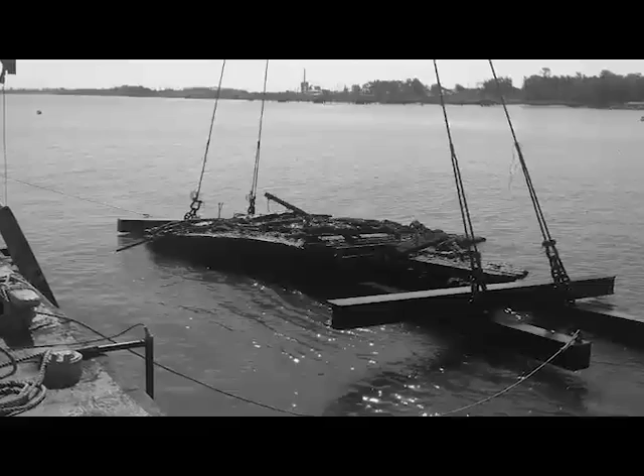The Confederacy continued with their habit of repurposing old ships and, like a nautical Dr. Frankenstein, brought the Merrimac back from the dead. The additions they made would render the ship unrecognizable. The newly named CSS Virginia sported 10 cannons, an armored casemate, and a ram like the Manassas. Because of the thickness and angle of its armor, it became a near unstoppable floating fortress. This ship posed a significant threat to the Union's navy.

The Union caught wind of the construction of the CSS Virginia early on. Realizing the potential threat that the new ironclad posed, the Union began to consider building their own. The Navy employed famous Swedish inventor John Ericsson for the creation of their ironclad. Ericsson was very forward-thinking and had pushed for a new and highly experimental design.

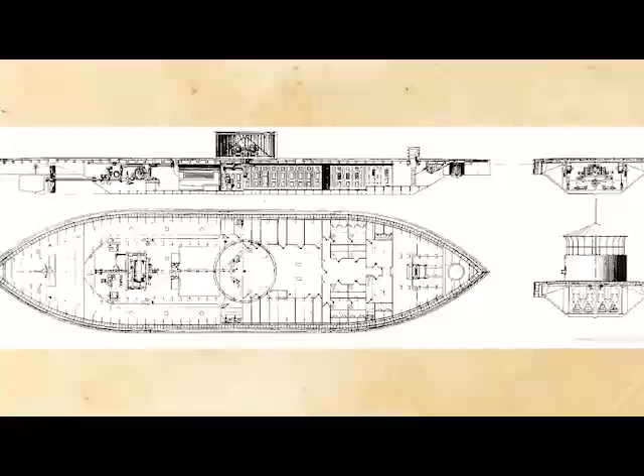His ship would be entirely steam-driven and feature the revolutionary addition of a rotating turret armed with 2 Dahlgren guns. It was the first the world had seen of its kind. This radical departure from traditional ship design wasn't without its controversy, but despite this, the government approved of Ericsson's idea.

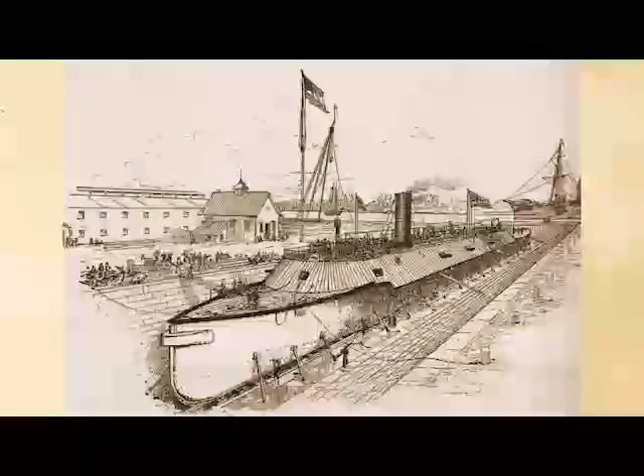Ericsson's ship, dubbed the USS Monitor, had only taken 118 days to launch. However, much of the focus the Monitor received from the press during its development was very critical. It was designed with the goal of rivaling the CSS Virginia, but its highly experimental nature and short development time made the ship seem like a significant gamble.

Yet this gamble was very necessary if the Union was to have a competing ironclad in time. While it didn't immediately sink like some had expected or hoped, it did have some issues with steering and engine power.

Because of the Confederacy's head start, the Virginia was nearing completion, so the Monitor's testing phase was somewhat rushed. The moment Ericsson finished testing the Monitor, it was sent south to Virginia in hopes of preempting the Confederacy's ironclad.

However, the Confederacy had just finished the CSS Virginia at the time and sent it to Hampton Roads to destroy the Union blockade that was blocking Confederate supplies from reaching ports inland.

From the moment of its arrival on March 8th, the Virginia was nearly unstoppable despite being incredibly outnumbered by Union ships. It rammed and subsequently sank the USS Cumberland, ran both the USS Congress and Minnesota aground, which caused the steam frigates St. Lawrence and Roanoke to retreat.

The day had been a real victory for the Confederacy as they were able to inflict over 280 Union casualties and extensive damages while only suffering trivial damage to their own ship. The Virginia did have to temporarily withdraw as the ship's deep draft was incompatible with low tides.

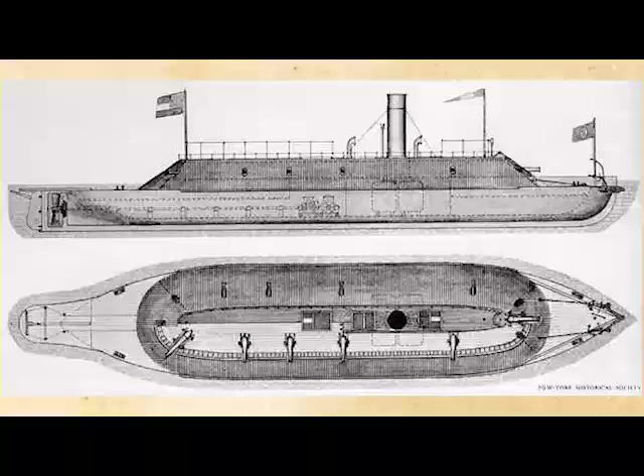The U.S. Navy had never seen a defeat this bad before. Large crowds of civilians and sailors watched this battle unfold. Even more were present the next day. Because so much was riding on this battle, people thought that it would possibly determine the outcome of the war.

The morning of the next day, the Virginia came back to finish what it had started. However, this time things wouldn't go as smoothly for the Confederacy. The Union's ironclad, the USS Monitor, had arrived to reinforce the fleet.

Aside from being equally well armored, the Monitor was much smaller, and its turret was the only part substantially above the water and able to be hit. Additionally, it was more maneuverable due to its more advanced engines and smaller size. Its turret only compounded this advantage.

However, despite all of the advantages that it had, it lacked the firepower to really damage the Virginia, and vice versa. This led to a long and intense battle that lasted almost 4 hours. Neither ship sustained anything more than minor damages. Because of the perceived invincibility of their respective designs, both armies viewed the outcome as a victory.

The Battle of Hampton Roads was significant in establishing the reputation that ironclads had. It demonstrated without a doubt that ironclads were far superior to conventional wooden warships in terms of effectiveness.

Nathaniel Hawthorne wrote about the event: 'The last gun of the Cumberland, when her deck was half submerged, sounded the requiem of many sinking ships. Then went down all the navies in Europe.'

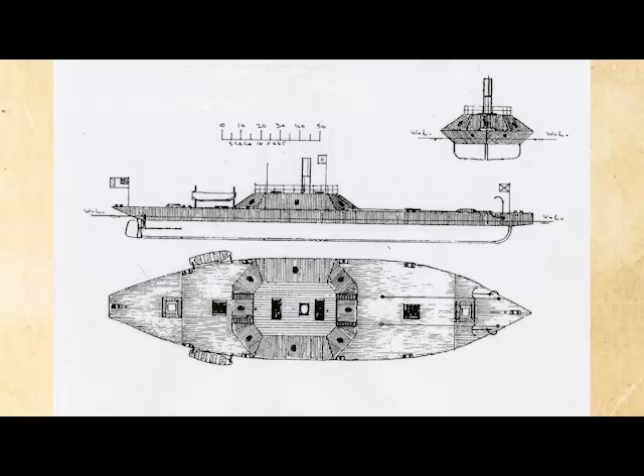The South made more ships inspired by the success of the Virginia, like the CSS Texas or the CSS Tennessee, which were both low-down river boats with slanted metal casemates. The Union was also inspired by this design and made many similar gunboats for their navy.

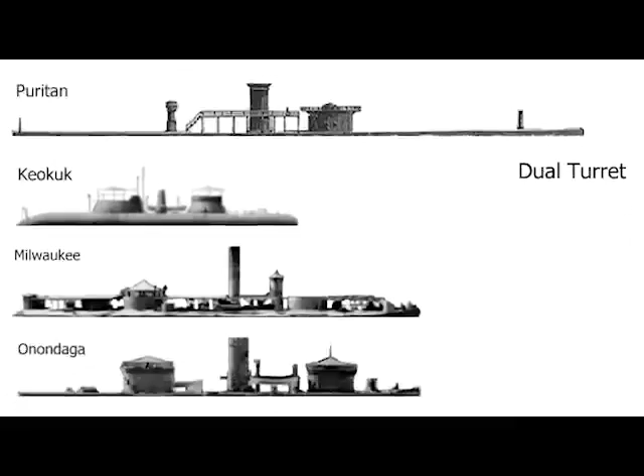Because of their greater industry, they were able to make more complicated designs as well. They continued to develop more advanced Monitor-class ships under the design of Ericsson. While the Confederacy had been the first to use ironclads, the Union quickly followed with the production of theirs and maintained naval superiority for the rest of the war.

Because of their comparatively low amount of ironclads, the South had to rely on many refitted civilian ships to make up for the disparity between navies. These ships were often woefully under-armored and undergunned.

During the Battle of Memphis on June 6, 1862, the Confederate naval forces were composed of 8 minimally armed trade ships that came up against 5 Union ironclads accompanied by 2 rams, heading down the Mississippi River to assault Vicksburg.

In a very odd move, the Confederacy used their surplus of cotton to their advantage, and had loaded their ships to the brim with bales of it as makeshift armor. The strategy of these amusingly named cottonclads was to use the cotton to allow it to survive long enough to get within close range of the enemy ship.

Unsurprisingly, this wasn't a viable tactic, and the battle ended with a Union victory, with 7 out of the 8 Confederate cottonclads being knocked out, while only 1 Union ram was damaged significantly.

The Union's use of ironclads provided invaluable aid in many battles and enabled them to take over the Mississippi River. They played a large part in the Battle of Fort Hindman where they suppressed the fort's defenders and allowed the infantry to advance and take the fort.

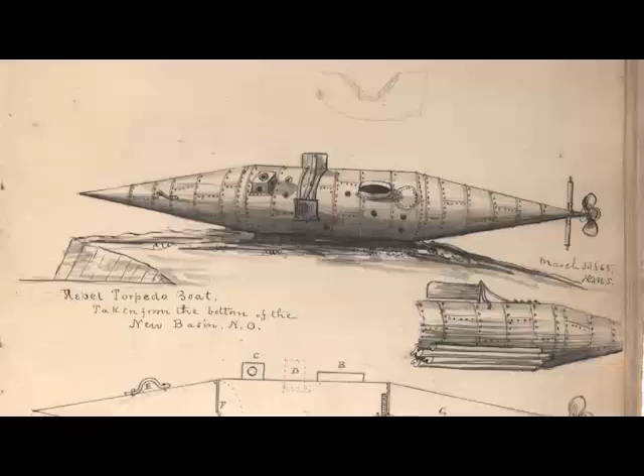It didn't see any combat, however, as it had to be scuttled to prevent capture from Union forces. After their next submarine design, the American Diver, sank in rough waters, the Confederacy created the first somewhat successful submarine, the H.L. Hunley, in 1863, named after its creator.

The Hunley was the first submarine to ever sink any vessel when it attacked the USS Housatonic. It was armed with what was essentially an explosive charge attached to a long pole to damage enemy vessels. This charge was likely too powerful for the Hunley to withstand, as it was lost during the attack. However, the cause of its untimely end isn't fully known.

While relatively few Americans were able to witness their battles in person, many soldiers and citizens alike knew the reputation that ironclads had because of these battles. Due to their unfamiliarity with the new technology, the public had both fears of the enemy's ships and doubts of their own. Ironclads often determined which side would win a naval engagement, and so they had countless indirect effects as a result of the battles that they had won.

They were also instrumental in blocking crucial resources to the opposing side. The tactical advantages that they gave determined the outcome of the war, and so played a large part in everyone's lives because of it. While the first appearance of ironclads was in Europe, it took their use in the American Civil War to get the world to realize their potential. The designs used by America were also revolutionary for their time and inspired many other countries to design similar ships.

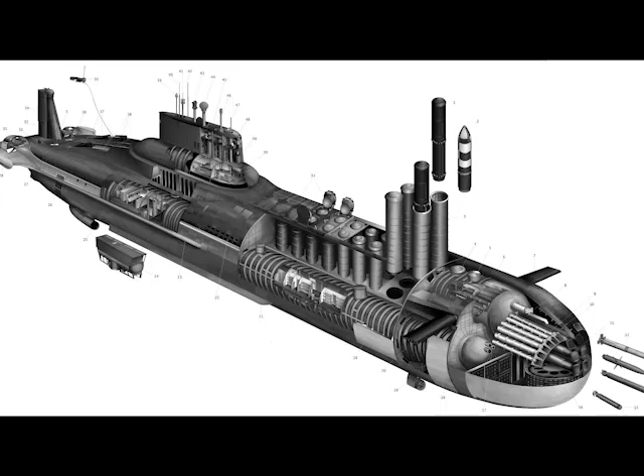Submarines similarly continued development as time went on. They played a large part in World War I and World War II in the form of German U-boats, and reached potential world-ending power with the addition of onboard nuclear weapons during the Cold War.

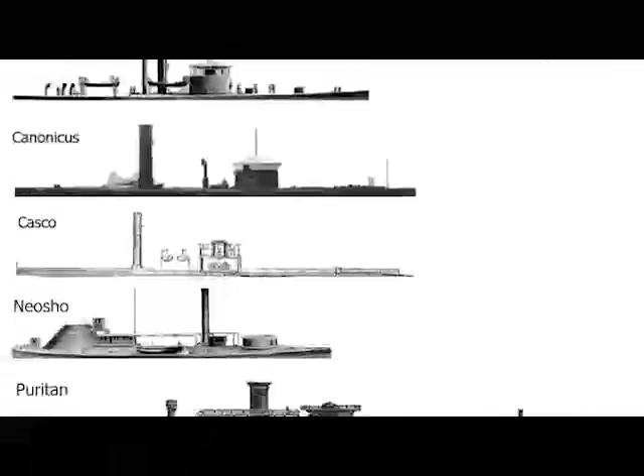I had previously known the superficial details of the Battle of Hampton Roads and the fight between the CSS Virginia and the USS Monitor. However, the background of and the effects following the battle were new to me. Additionally, I was unaware of the vast number of other ironclads that participated in the war. I was also previously unaware of the disparity in naval power throughout the war. My favorite bit of new information was regarding the Cottonclads. I'd previously not known anything about them, and I find their name quite amusing.

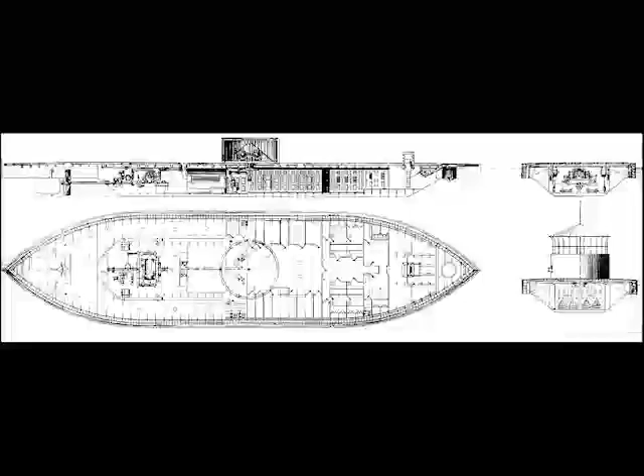Ironclads, submarines, and other emergent technologies saw their first practical use in the Civil War. They shaped many of the events that occurred in the war, and were the beginning of many technologies that would continue to shape wars after. While many of these technologies were comparatively primitive to what succeeded them, they were still very important to the history of warfare and are one of the main reasons why the American Civil War is considered by many to be the first modern war.